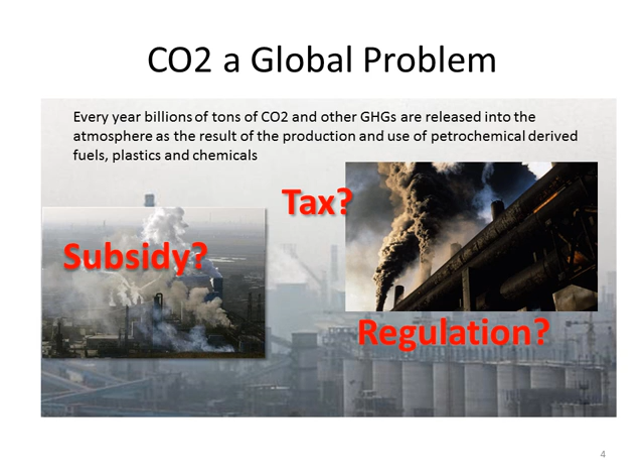Most efforts to address these problems to date have been government-led efforts focusing on subsidizing carbon capture, taxing carbon release, or regulating greenhouse gas production and release. But what if some of those gases could be captured and converted into renewable petrochemical replacement products at a net profit? Oakbio is developing a system to do exactly that.

Oakbio was formed in 2008 with a mission to develop a profit-driven biological method for converting CO2 from industry into renewable fuels, plastics, and other chemicals. The Oakbio system is built around specialized microbe strains which absorb CO2 and hydrogen and convert this into bioplastic and biofuels, as well as other chemicals. Our proprietary technology platform can convert waste CO2 and hydrogen into valuable and cost-competitive products at scale.

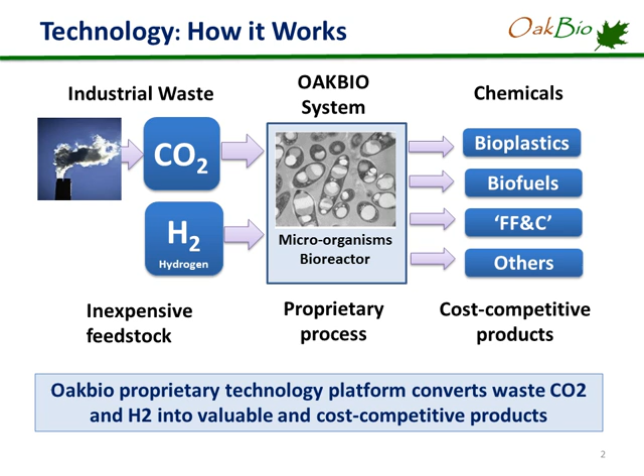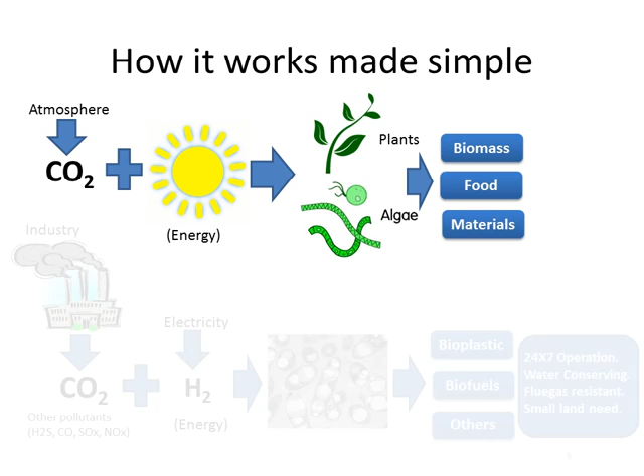Most people are familiar with how green plants absorb CO2 from the atmosphere and energy from sunlight and use this to grow, and in that way they produce biomass, food, and materials like wood. In the Oakbio process, CO2 from industrial flue gas is fed into the bioreactors along with hydrogen, which can be made from electricity, which is the source of energy, and the microbes convert this to bioplastic, biofuels, and other chemicals. And the advantage of this is the operation can run 24/7, it's water conserving, the microbes are flue gas resistant, and it has a very small land footprint as compared to agricultural methods of carbon capture.

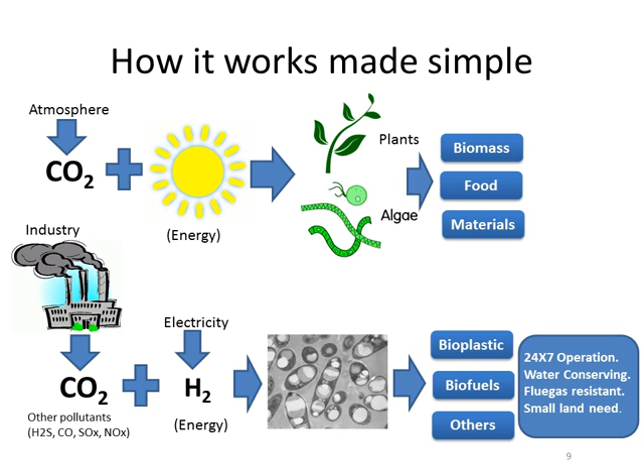The Oakbio system fits in very well with clean energy generation methods like solar, wind, hydroelectric, and geothermal because all of these produce renewable electrical energy. That electrical energy can be used to split water in the process of electrolysis to produce hydrogen, and that's quite an efficient process with modern technology. And that hydrogen can be fed to the bioreactor along with CO2 from industrial flue gas.

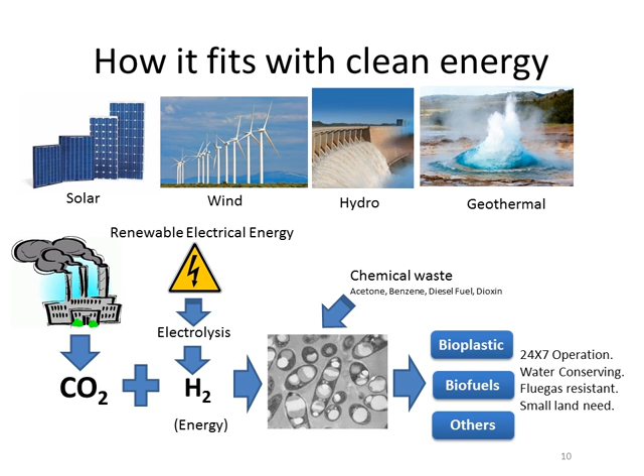And I should mention that our microbes do not necessarily require clean water, and in fact will grow on chemical waste contaminated water and absorb the chemical waste and convert it along with the hydrogen and CO2 into bioplastic and biofuels. And those wastes can include acetone, benzene, diesel fuel, dioxin even, and thousands of other compounds. And all of that will be converted into bioplastic and biofuels.

The Oakbio microbes are essentially tiny chemical factories. They grow off CO2, hydrogen, and organic acids, and they make up to 90% of their cell weight naturally in PHA, which is an abbreviation of polyhydroxyalkanoate, a type of bioplastic polymer, a large family of many different polymers. And you can see in these pictures the microbes have large white circles in them. Those are actually vesicles of bioplastic, showing the large production capability of the microbe.

And these microbes are fully sequenced. They can be modified to make new products. We have a toolkit to do that. And they're an excellent platform to make commodity chemicals at scale.

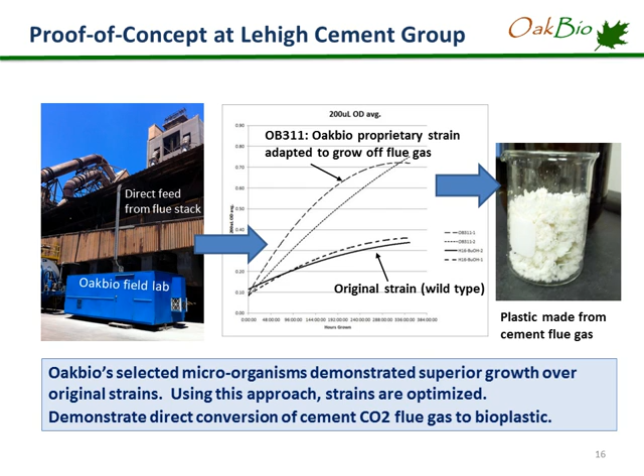Now, some people might wonder why we chose the cement industry, and it's a very, very simple set of reasons. The first one is that the cement industry produces about 1.5 billion tons of CO2 a year. Globally, that's 5% of all greenhouse gases, and cement plants are very large point sources of CO2.

But cement plants, as well as CO2, emit carbon monoxide, SOx, NOx, hydrogen sulfide, and other gaseous products or components of the limestone that's mined and heated. They release all these toxic things as well as carbon dioxide. And the takeaway from this is that flue gas has lots of CO2, but also many things which can inhibit or kill non-resistant microbes.

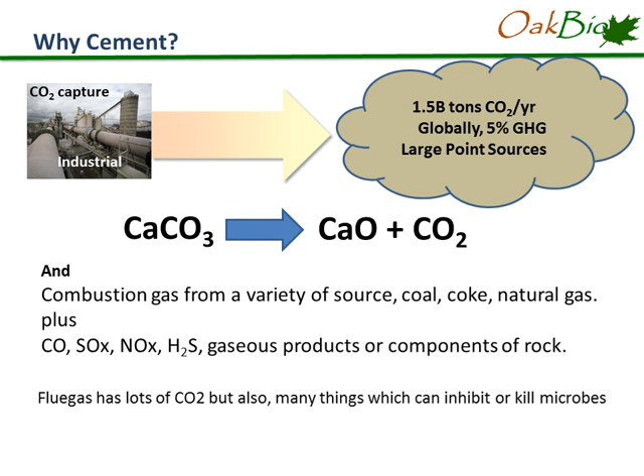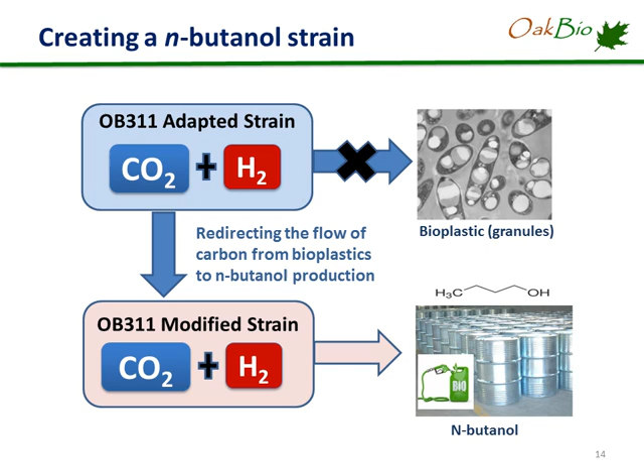To create our N-butanol producing strain, we took these same microbes that produce bioplastic so well, and we redirected the flow of carbon from bioplastic to N-butanol production. And that created this modified strain. N-butanol is a 4-carbon alcohol, which can be both a biofuel and a chemical feedstock.

For the CO2 producer, they would get either a tax credit or a subsidy, depending on where they're located, which averages around $13 a ton of CO2. They'll be able to increase production, particularly in the United States, where cement plants are limited in their total production by CO2 output, and they could make up to 25% more cement. The cement made when the CO2 is captured is green cement, so they'd get a premium price on that, and that's currently around 175% of what normal cement sells for.

They'd also get a little more flexibility in their sourcing of fuel, because when the CO2 and pollutants are captured and absorbed, there's more flexibility in which fuels you use to power the cement plant. So the takeaway from this is that the Oakbio CO2 to product technology generates revenue streams for both the CO2 producer and the Oakbio side, which captures the CO2 and converts it into chemicals.

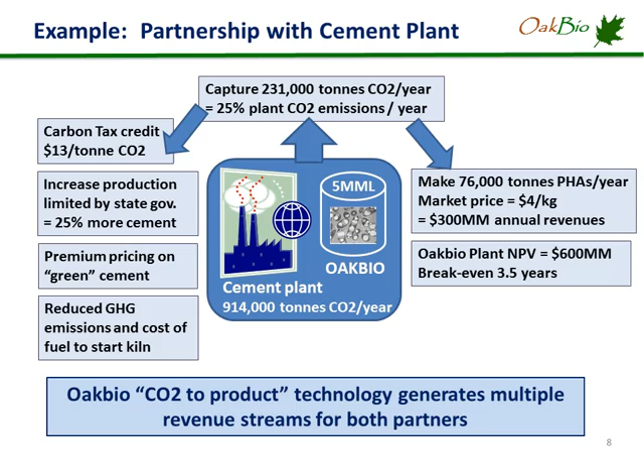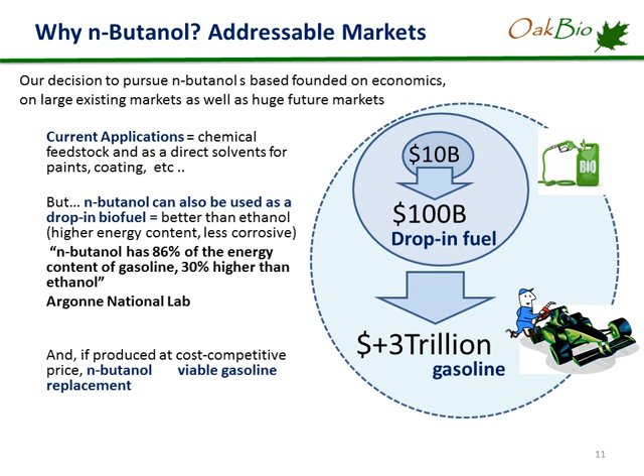That's a $100 billion market, and our target is to capture 10% of that market for an annual revenue of $10 billion. There's a larger market out there past the horizon of what we want to predict, but N-butanol is a viable alternative to gasoline. N-butanol has an octane rating of 87, and along with isobutanol, these could make a serious impact on the over $3 trillion gasoline market as a replacement fuel.

In conclusion, Oakbio has developed a highly disruptive technology which drives carbon capture on a massive scale and its conversion into useful chemicals. Our system is profit-driven and doesn't require government subsidies in order to make money. We use non-food-based feedstocks, so we don't compete with agriculture for land, water, or for the final products agriculture produces. Finally, our products are high performance. They can compete with petrochemical products in both quality and price.